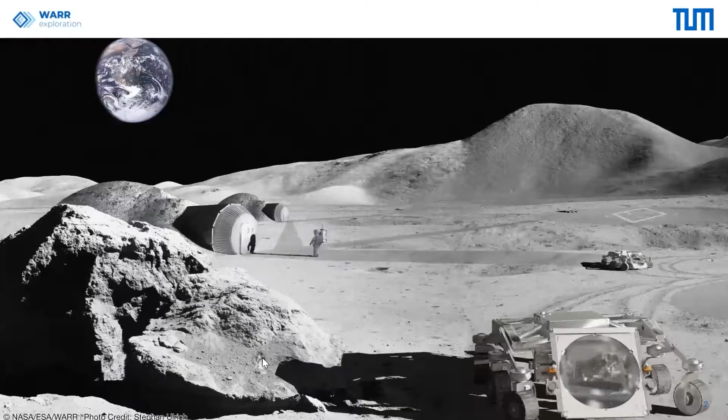Here's the first one. Of course, there's always a bit of delay with the signal being sent to the moon here. Here is an artist's rendering of a little idea from ESA known as the Moon Village, which is exactly what it sounds to be. It is a permanent human settlement on the lunar surface.

Now, before such a vision can be realized, there are quite a few open questions that must be answered. Among the chiefest of these questions is how can structures be assembled in an environment that is completely inhospitable to humans, and where the only resource to be seen for miles on end is useless moon dust? Well, this is where our project comes into play.

Hi, my name is Brendan Mance. This is my partner, Zekar, and we are the team leaders of WARR Exploration. Our current project, Project Rebels, hopes to, within the framework of ESA's Moon Village, create useful structures like houses and roads and all the stuff that I mentioned before from otherwise useless moon dust or lunar regolith. But before we go into talking about the details of our system, I'll give the floor over to Saif, and he'll give you all a short history of our team.

Saif, take it away. Thank you, Brendan. WARR, die Wissenschaftliche Arbeitsgemeinschaft für Raketentechnik und Raumfahrt. Translated, the Scientific Work Group for Rocketry and Spaceflight was founded in the year 1962 to compensate for the absence of an aerospace faculty at the Technical University of Munich.

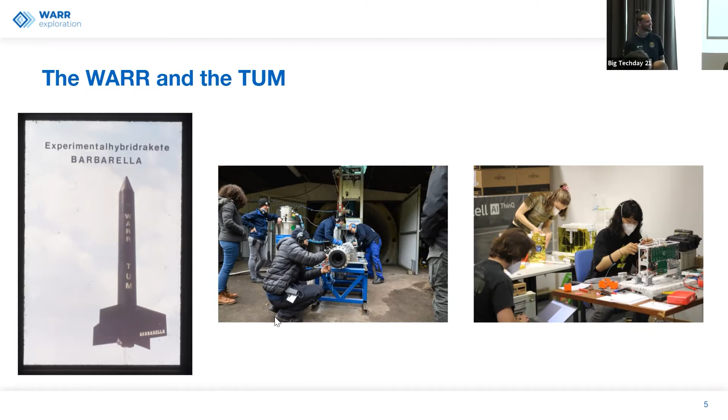We have some signal delays from the moon again. The WARR exploration team started in the year 2018 with the aim of taking part in the European Rover Challenge. Through our efforts, we came up with the Warthog, sporting its science equipment. The Warthog was designed to traverse the harsh Martian terrain and collect and store samples.

After 2 renditions of the European Rover Challenge, we sat down and thought to ourselves, is this really what we want to be doing? The European Rover Challenge offered a framework for a friendly competition environment, as well as gave students the opportunity to exchange ideas from different universities, from different countries across the world. However, it expected students to tackle a broad spectrum of challenges, all designed to tackle the harsh Martian surface. But because of this broad spectrum, it offers little room for innovation, instead encouraging industry standard solutions.

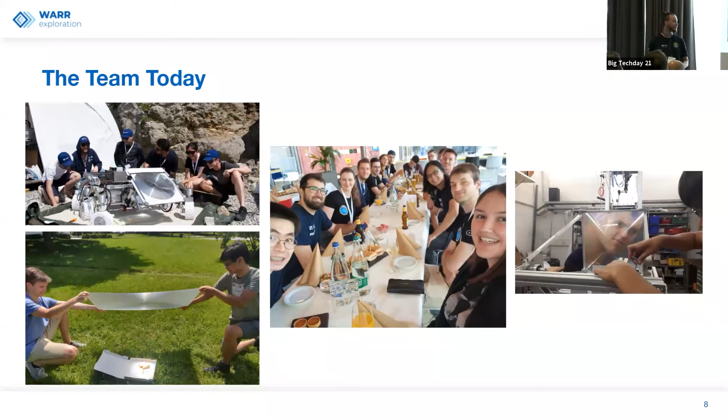As you can see here, this is our team in Switzerland at the Igluna field campaign at the top of Mount Pilatus, running experiments with our rover. This was actually the first opportunity since the corona pandemic hit for us to do a group picture and actually be together in one place to test what we had worked on all this time. Here you can see a bunch of our teammates heating up lunch using our Fresnel lens, but we will get to that later on.

Now, to talk to you more about our mission, over to you, Bren. Thank you very much. So you've heard a little bit about our history, and you've heard a little bit about exactly what we do. Now, you'll hear why we do it.

So, just as a short reminder, because of how important this picture is to our cause - this, again, is the ESA Moon Village that we would so much like to be a part of.

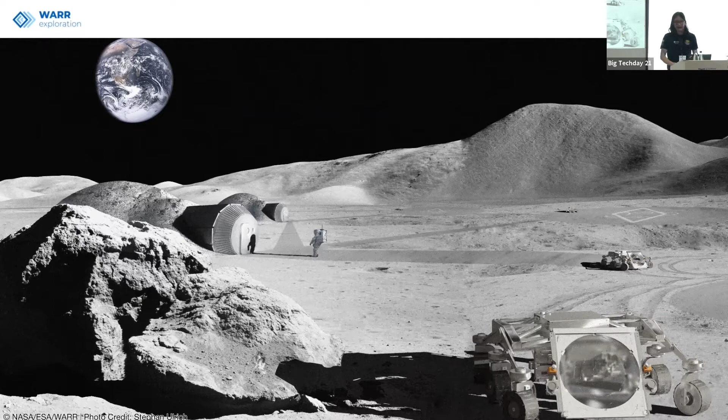Now, the mission that we have right now came to be from a variety of space exploration buzzwords, so to speak, and I'd like to talk about a few of them. The first is the Global Exploration Roadmap. I'm sure many of you would be familiar with the fact that many space agencies across the world have had interest in colonizing Mars for the past few decades. But in recent years, it's been decided that a very important intermediate step would be to first go to the moon and completely test all of our technologies necessary for further exploration. That's because if we can successfully settle the moon, this validates the possibility of going further to Mars and beyond. So that is why we chose the moon as the site for our hopefully future mission.

This next buzzword is probably the most important because our entire project is based on it. If there's one phrase I want you all to know at the end of the day, it's in situ resource utilization, ISRU for short. NASA gives a very concise, elegant definition for this: any hardware or operation that harnesses and utilizes locally available resources in order to create products and services for robotic and human exploration.

Now, why is this relevant? Because it would increase our mission performance. Think about it - if we can get away with sending less materials on the initial launch of the mission, you cut down on launch costs and increase the success rate of the mission. Also, with less launches needed because you can use resources available on the surface, you're able to stay there for a longer period of time. So yes, mission performance would be greatly helped by those two factors.

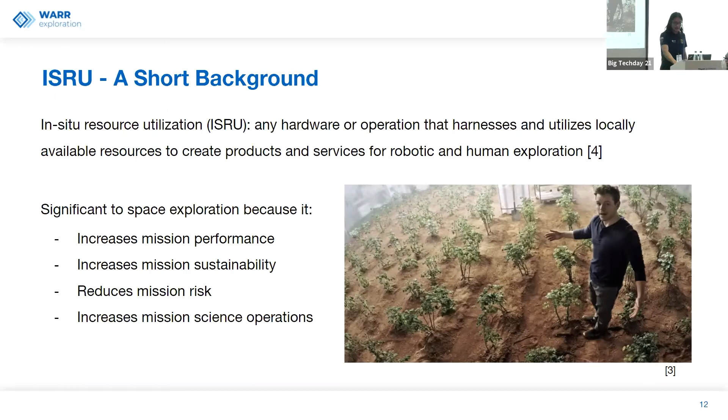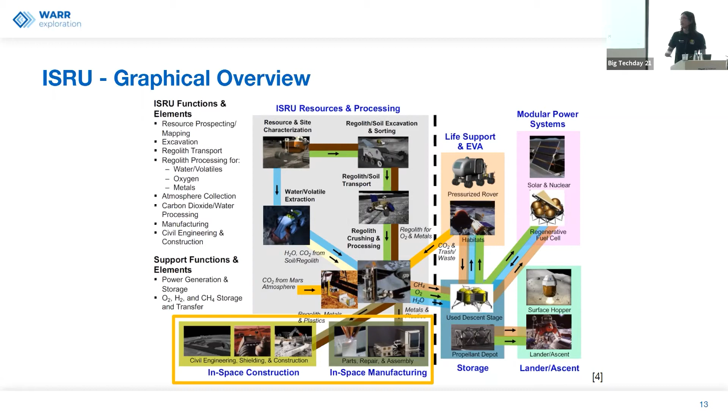Now, a short graphical overview of this entire concept of in-situ resource utilization. Down the center, you can see the entire production chain of acquisition, prospecting, and processing of acquired material. At the very bottom is in-space construction and in-space manufacturing. On the right, you see the very important support systems, including life support, power, storage, and transportation.

So why is ISRU significant for the moon village? The dominant concept right now for structures sent to any prospective moon village would be to first send a plastic pressure vessel on the initial launch. This pressure vessel, upon landing, would inflate and serve as the foundation for habitats constructed later.

However, this plastic habitat is not sufficient to protect our astronauts from environmental hazards such as micrometeorites or radiation. Therefore, we need an extra layer of protection on this pressure vessel, which would be lunar regolith heaped onto the habitat as a shield. However, if you just pile dust on top of a structure, after time and a few impacts, all of that will go away and our shield will be rendered useless. So we need a solution for holding it in place, and that's where our structure building comes into play. We turn this regolith into rigid material for use in this shield.

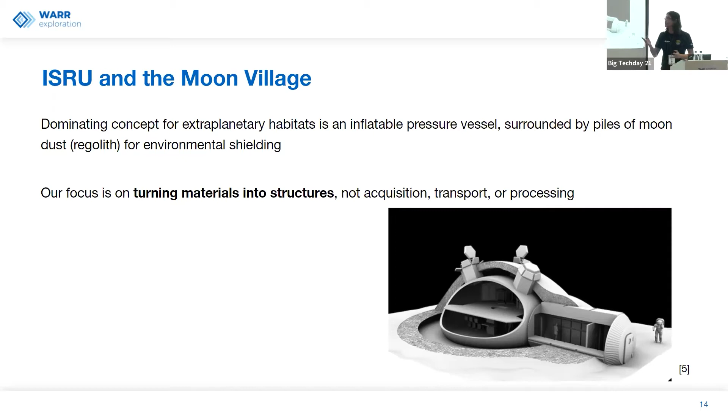So now you've heard what our mission is. Now let's start to talk about exactly what is under the hood, our system.

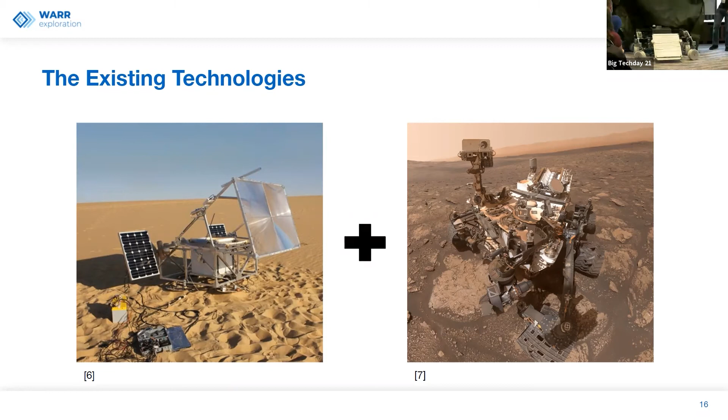Here is LARSS, the Lunar Automated Rover for Solar Sintering. You can see an abbreviated version of the solar sintering apparatus mounted on the very front of the rover, and a rover based on Curiosity and its siblings with its standard rocker-bogie suspension arrangement and general structure. Unfortunately, we can't get him to run today for safety concerns, but we'd like to talk to you first about how this concept came to be. Then we'll go into the technical details about LARSS himself, and share some findings from the field campaign we showed earlier from the Igluna.

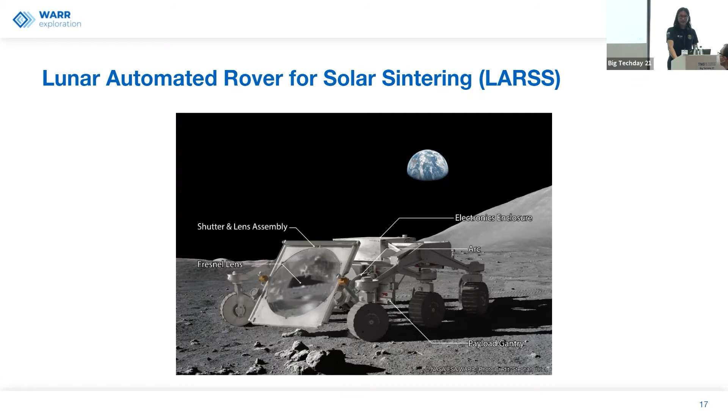The first area of conceptualization I'd like to talk about is the rover itself, the mechanical part, the driving part. We tried quite hard to find a new, innovative solution that didn't completely copy NASA's design one-to-one.

to all be in different trajectories. This allows the footprint of the rover to be minimized, as each wheel will travel over one particular piece of ground only once, and therefore decrease the destruction on the surface. However, we eventually realized that we won't need to drive over any sintered material that we freshly created anytime in the near future, so we deactivated this requirement. The Skater Boy was an unnecessary level of complexity that we discarded, and we reverted back to the Normie.

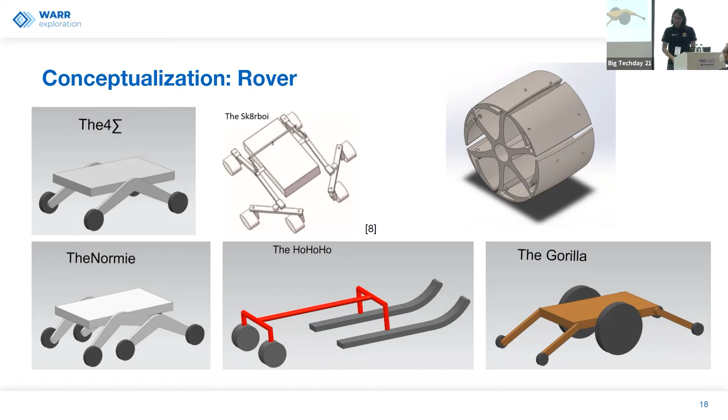Myself and a few of our other mechanical engineers were sitting in a Zoom call trying to come up with a good concept to fulfill our requirements. And we were looking at the various letters on the keyboard, trying to see which of these geometries would actually help us achieve a center of mass that was lower towards the back of the rover, so that when the

payload would move forward and backwards, the weight would be offset. Yeah, so the entire idea of modifying the chassis was to make sure that there would be space and proper functioning room for the payload.

Our second part here is an abbreviated undercarriage from the rocker bogie suspension arrangement. This again, like said before, it's very similar to the one used by NASA on the Curiosity rover and all its other exploration rovers. And here, instead of those radical wheels that we showed you earlier, we have a more conservative design with interchangeable profiles, so we can manually switch the profile depending on the application that we want to go on at the particular moment. So that's the mechanical design of the rover, but how does it move?

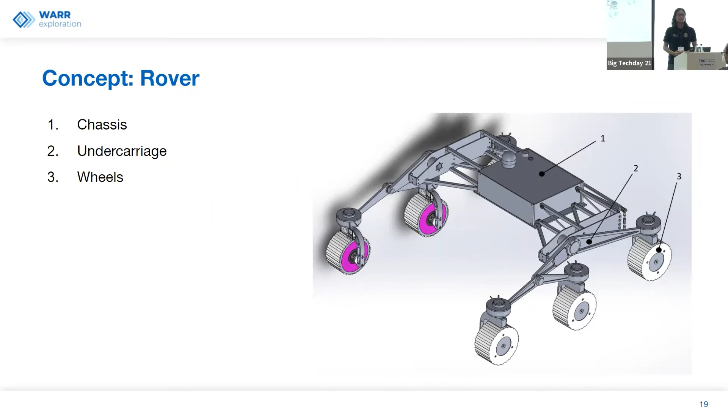Saifullah will now tell you about electronic speed control. Thank you, Brandon.

Why don't you buy your own ESCs? A phrase that we asked ourselves a lot, a phrase that was told to us a lot.

So when you imagine a rover, you think of this extraterrestrial electric vehicle with all this high tech driving around these rough surfaces on planets. But in a sense, the hardware that controls the motors, the hardware that drives the rover around, is pretty similar to the hardware that drives our electric vehicles back on Earth.

So in a sense, this problem, an electronic speed controller, a motor controller, already has a multitude of industrial solutions that we can go with. But as I mentioned before, we wanted to innovate. And oh boy, innovate we did.

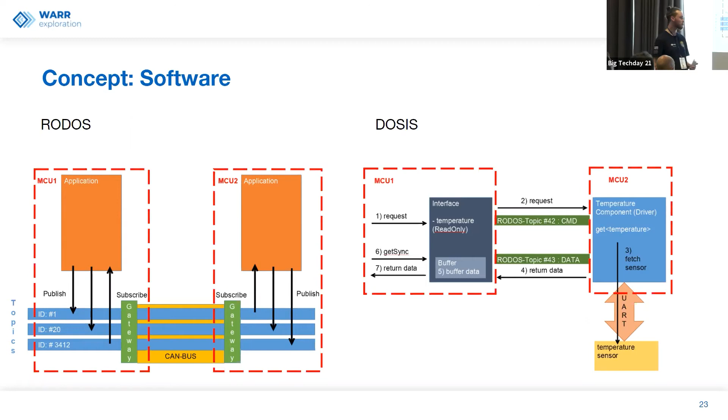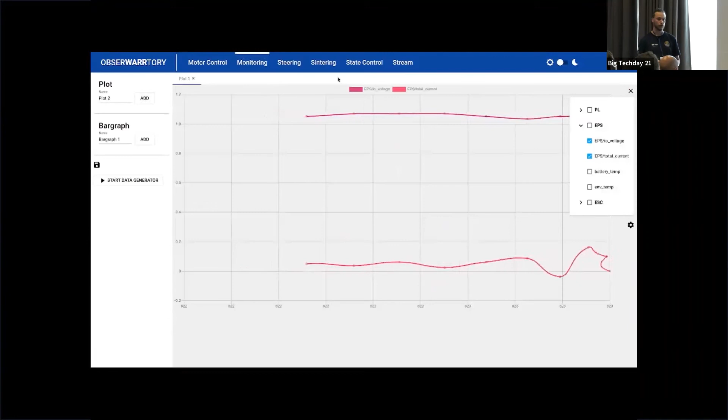The ObserWARRtory offers different tabs to be able to operate and monitor the rover. Once an operator connects, he can choose from a list of different sensor data, which is all transmitted and viewed in real time to the operators.

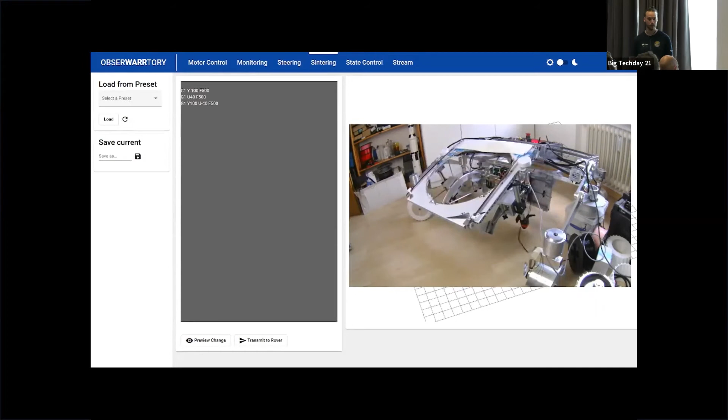Operators are also able to send an instruction or a set of instructions to the rover to be executed. Those instructions, as I explained before with our software, end up finding their goal and being executed. Here we have a series of G-code transmitted to our payload, and voila, it moves around. It's as beautiful as that.

This web application was designed with the idea of multiple operators in mind. This means all you need is a laptop and a solid connection. You're able to connect to the rover, monitor whichever part you want, command whichever part you want.

Now, with all those electrical consumers and all those processing units on the rover, we need somehow to be able to deliver power to all of them. And as I mentioned before, they should all be able to communicate and synchronize with each other. So there has to be some data bus to enable that.

Now, we can go with a traditional approach, of course, and design a cable harness, which really does not look appetizing, is very complicated to plan, requires real extensive planning, and once you decide you need to make a slight change, you need to dismount the entire thing and rebuild it again.

So this approach was not very versatile for us. We had to innovate once more and come up with our own solution to this problem. Ladies and gentlemen, I present to you the power terminal, a circuit board with a set of standardized connectors working on the plug and play concept.

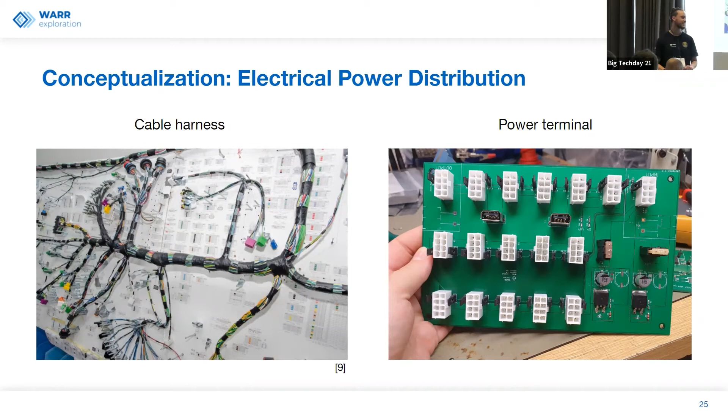Now, of course, our power distribution system consisted of 3 of those power terminals located in the center and at the sides of each rover, all connected together. We would power the rover using a lithium iron phosphate battery. And we also designed our own battery monitoring and observing system to be able to calculate power consumption by the system and also to make sure that it stays in the safe parameters.

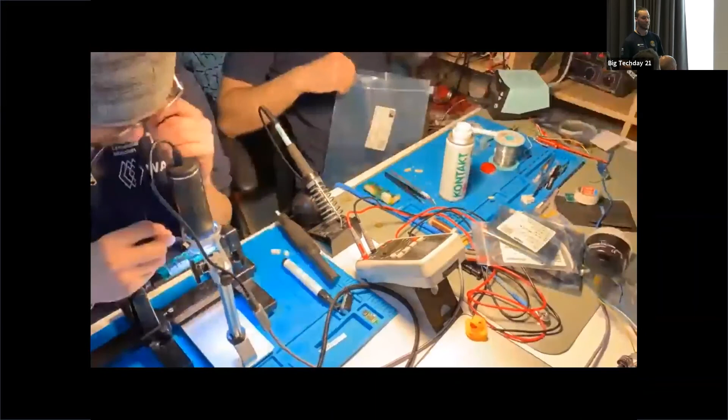And now we have another short video of some production and testing that we did. This is the manufacturing of our ESCs. Some of the components that we used on them were really small that we really had to work with microscopes to be able to manufacture those.

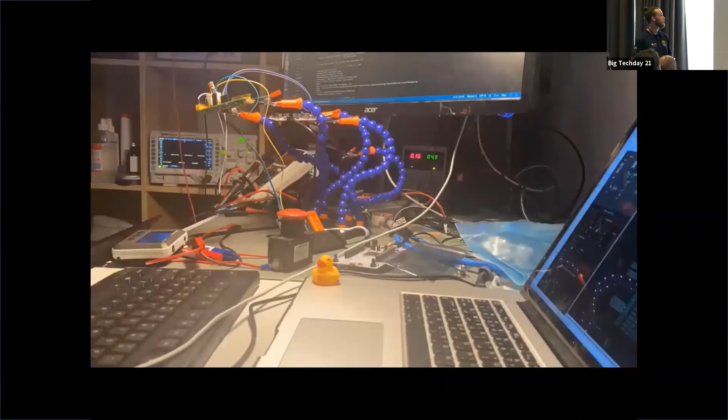Here we have some software testing for our battery observation system and monitoring. And here we have some testing and implementing of the software which drives our motors. And yeah, those were good times, stressful times at some point, but in the end of the day, here we are.

Now, moving on to the interesting part of the rover, the payload, the part you've all been waiting for. Brandon, take it over. All right. Well, you may probably be asking why exactly we decided for solar sintering. So let's quickly go to an overview of all the different options that we had for our sintering application.

So for additive manufacturing, in the context of in situ resource utilization, we can go with binder using processes. But for this process to work, you would need large quantities of binder that you would bring with you on the initial launch. And of course, that sort of defeats the entire purpose behind in situ resource utilization. So we decided against that in favor of non-binder powder bed fusion technologies.

And of these, there are 3 that we have considered. First, we have microwave sintering, which is capable of sintering large areas all in one go. Unfortunately, this method only works for real, authentic regolith sourced from outer space because they have nanoparticulate iron particles that really can't be replicated in a lab here on Earth. So no simulant can actually replicate those qualities. So we decided against microwave sintering.

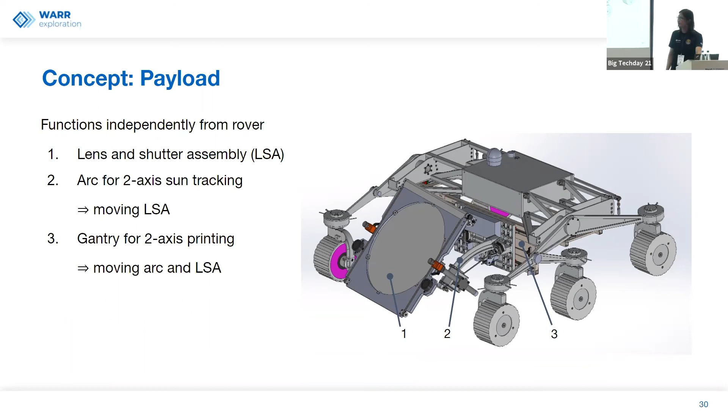First and foremost, when we did a risk analysis very early on in the development process, we underestimated the criticality of having good weather. We expected there to be 80% of the days on a hot summer July at the top of a mountain to have almost clear skies and perfect sunshine. Unfortunately, that didn't happen. It was all cloudy, and that did not work out in our favor.

Also, while we were sintering, we discovered that the solar tracking was a little bit too sensitive to be particularly effective. Every minor disturbance, every cloud that would come into view, any person walking on the side would kind of disrupt the solar tracking and confuse the entire system, making the focus spot out of focus.

Then also we discovered that the payload was missing a degree of freedom. We needed an additional up and down motion in order to increase or decrease the spot size generated by our lens, to make sure that we always have an even sintering energy down at the ground surface.

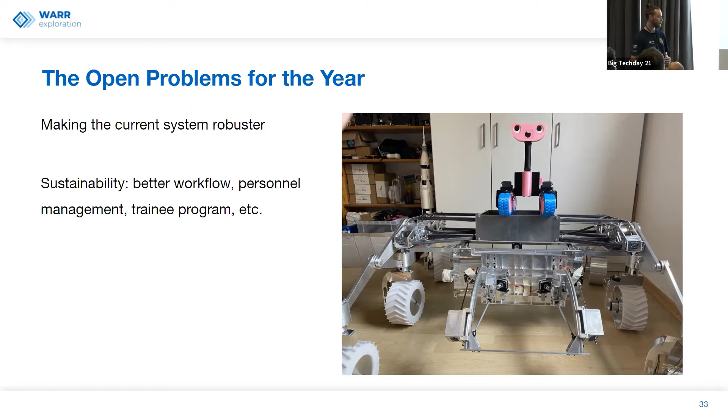For the near-term future, we are looking into taking the sintering concept into the third dimension. As we are right now, we only sinter two-dimensional geometries. Now, of course, how this would work, it would need to be a layer by layer sintering concept in a sense.

We are also looking into using doped simulants, as in simulants mixed with other materials. One suggestion from our industrial partner, Orbit Recycling, was to use a mixture of regolith and aluminium, to actually melt the aluminium and use that to bind the regolith together.

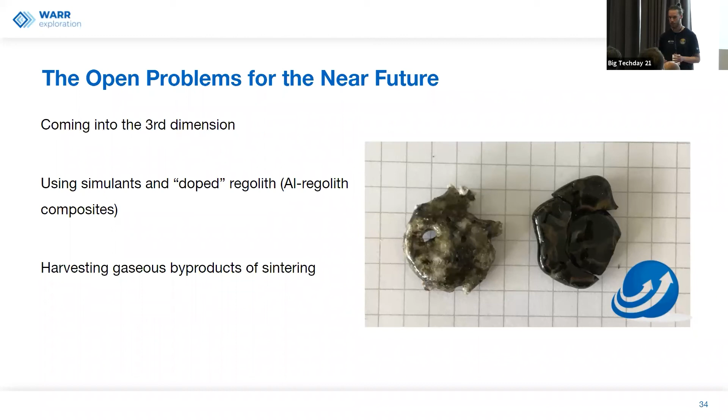There is also the opportunity to harvest the gaseous byproducts of the sintering process, such as oxygen gas, which would be a valuable resource on the moon.

Our technology is still in its early days. It needs to be matured, possibly through terrestrial applications, before considering lunar application.

We are a group of students with the aim of further developing lunar exploration technology. As children, we used to be fascinated by magnifying glasses. Go outside on a sunny day, focus the sunlight and use it to burn up a sheet of paper. Some people used ant colonies for that. From a child's curiosity and a knack for experimentation, this concept was born, the concept of solar sintering.

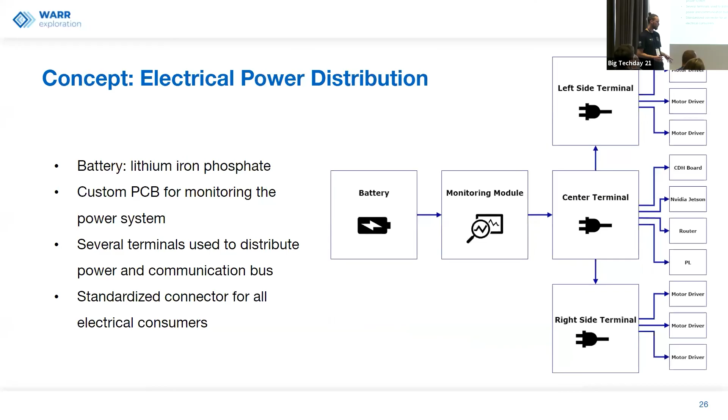Thank you for the talk, it's very fascinating what you're building here. The boards that you designed, are they already radiation hardened or radiation tolerant, or is this still terrestrial stuff? The motor controllers, no. Everything on the system as it is built is for terrestrial applications. This is still in its early stage, and we decided to focus more on the proof of concept of solar sintering, so nothing is radiation hardened as it is. But that's a near future step to take, of course.

My question is in a similar direction. If I see optical parts together with a sand area, it seems that the Fresnel lens will not live very long. Did you consider that, or how much larger is your current Fresnel lens than you would need to generate power? How much dust can you live with on the surface? As we said before, we haven't really considered our proof of concept in a space environment yet. We're still trying to develop it on Earth, and we did start to consider dust mitigation strategies, particularly this shutter here that can fold itself and reveal the lens. But that's obviously a very low-level solution at the moment. We need to investigate more sophisticated dust mitigation technologies in the distant future.

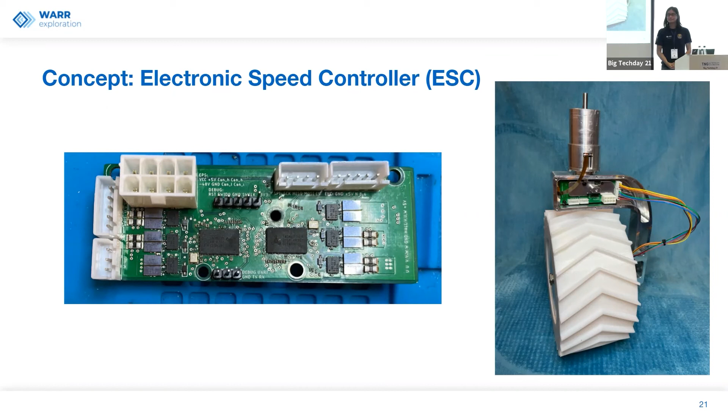We have a few questions from remote participants. One is: I can imagine the sun's radiation intensity is much higher than on Earth's surface, so the system makes a lot of sense there. Can you say roughly what factor, how much stronger the intensity is on the moon's surface? Or even better, what's the power in watts that you expect?

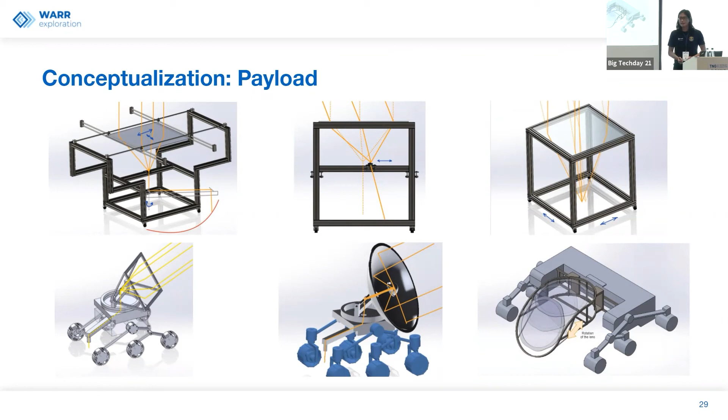This is unfortunately a bit of a question for our payload specialist, who couldn't be here today. But what I can say is the temperatures we reach with our current setup are, if I remember correctly, about 900 degrees Celsius. Yeah, 900 degrees Celsius. This is currently suitable for our application in melting a soda and quartz sand mixture and sintering that - that's what these were generated from. We also tried our luck with legitimate lunar simulants given to us by the chair at our university. These were a bit more temperamental to work with for reasons we haven't yet fully explored, but we will explore that earliest in the next year.

How does sintering in low gravity in a vacuum compare with testing on Earth? This is another question about our very far distant future space application, and we really have not considered that at the moment.

What's the reason you decided to use CAN-bus technology to communicate instead of a modern gigabit network connection. This is a question for our electronics specialist too, but the reasoning behind using CAN-bus is its versatility - all you need is 2 cables routed around the entire system. It's simple, it's easy to use, and with the real-time operating system we use, CAN-bus was actually the standard mode of communication between our microcontroller units. CAN-bus is also readily available on most microcontroller units you can buy today, so it was sort of the natural choice. I hope this answers your question.

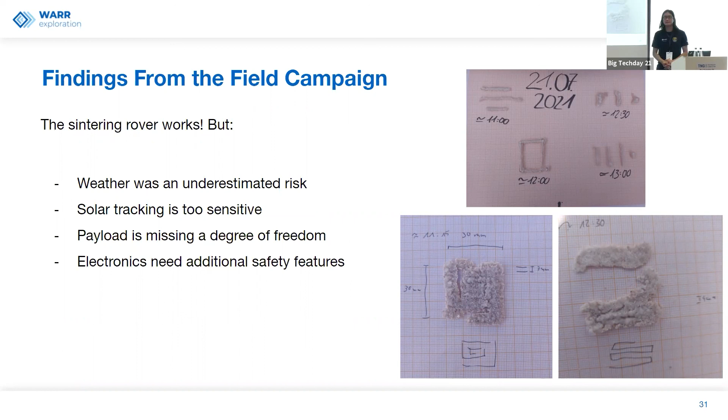One more question about sintering from Andreas Zoller: during your tests, are you sintering artificial lunar sand, or how do you test that it will work with the actual lunar material? I answered this a bit in the previous question - we used a quartz sand and soda mixture, and the flux material was the soda, the easily meltable material that could bind the harder-to-melt sand particles together. Again, in about a year, we expect to be able to work with legitimate lunar simulants.

A lot of backup slides, sorry.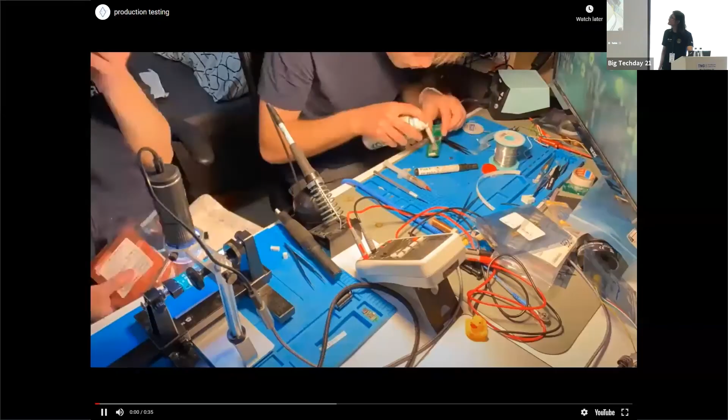One more question in the same area, probably. The sintering, what's the resolution you can get, and how is the error? So I believe we are able to achieve focal spot diameters of 2 to 3 centimeters. Unfortunately, I can't give an exact number as to just how much resolution we can get with that spot, but all I can say is that the spot is about 20 to 30 millimeters.

Okay, do we have any more questions? Of course. I don't need to ask a question, but yeah.

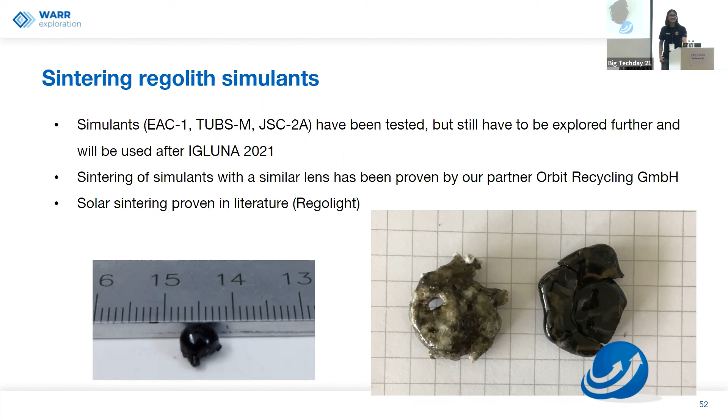So when you talk about your next edition of this vehicle, I assume that a whole bunch of problems could be solved by extending the size of the vehicle, right? So when it comes to the time needed to sinter material and also the maximum heat you can reach, did you plan for a bigger vehicle as well? I mean, there's on the other hand a trade-off with what size of vehicle you can send to the moon, right?

Yeah, this is actually one thing that we had to cut for time in our presentation, but I'm glad you asked this question. The scalability of our rover was something we have been struggling with very early on, because we were envisioning either really small rovers that would drive on freshly sintered surfaces and just build them up layer by layer. But we also had an alternative concept of a gigantic rover with a crane arm or something similar that can sinter very large portions of a habitat just by standing in one place, and then move to another place to generate the next part of the habitat. So we don't have a concrete answer as to exactly how we're going to scale the rover, but this is something we will work on in the distant future. For the next year, we're just going to make LARS a lot more robust.

More questions? No. Okay, we have time. Sorry. Okay, last one from me.

When you sinter the materials, do you sinter them at the place where you need it, or do you use like a football field, sinter there, and then pile it up somewhere else? No, we sinter them where we need them. We had a test sandbox, and we just sintered directly on the ground. The approach that we're going towards is not to sinter bricks or some intermediate material which can be used, but to actually sinter the structure on spot, directly where it shall be used.